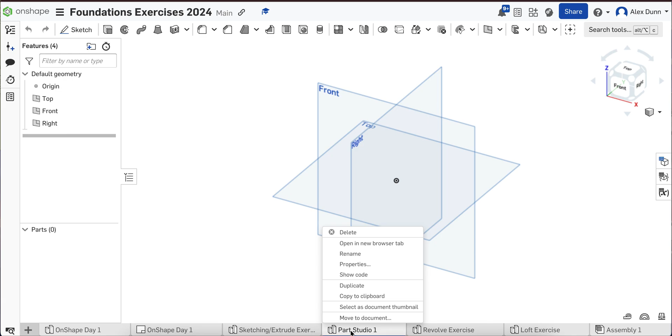This is a sketching and extrude exercise. Based on what you've already done in Onshape, you should be able to complete this using the tutorial video. It's a more advanced sketch. The extrude part is nice and quick and easy, but I'm going to go through this with you together. So you're going to create a new part studio, just as I'm doing here.

You're going to follow along and rename that sketching/extrude exercise. I'm going to be using my original sketch as my base to walk you guys through this. So this is essentially the shape that we're going to be drawing.

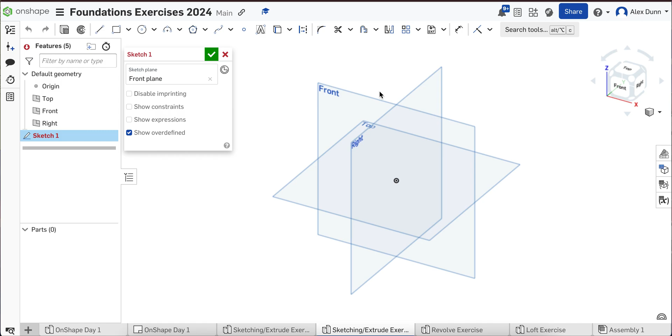Now I'm going to start off with this center point circle that's 8 inches in diameter. We are working in inches. So I'm going to make a new sketch on my front plane so I could view my gear from the front. Then I'm going to make a center point circle that's 8 inches in diameter, and then go ahead and zoom out.

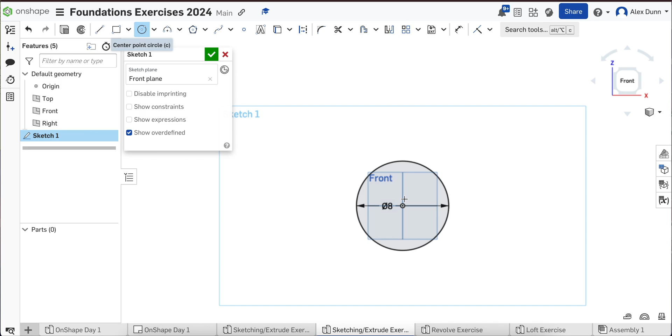Okay, now let's look at the next step. The next step I would go about doing is create this outside circle. If you're ever in an Onshape document and you don't know the diameter, length, or width of something, click on the shape and you'll see the dimension at the bottom right corner. The diameter of the outside of my gear is 30. So I'm going to go back to the document we're working in now and use a center point circle starting at the origin, also 30.

Now let's go back to our reference document. The next step I would probably do are these circles. I was able to do these circles really quickly using a circular pattern, so I'm going to show you how to do that. The diameter of my circle is 2, and that circle is both in line with the origin and 9 inches from the top of my outer circle.

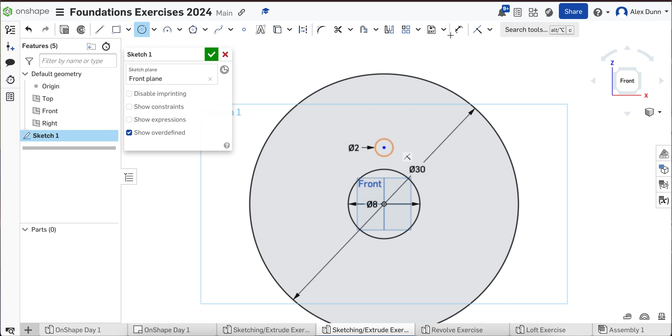So I'll use a center point circle, hover over the origin, and slide my mouse up. You see that dashed yellow line - that ensures it's in line with the origin. I'll click down and swipe out, then change the diameter to 2. Then I'll take my dimension tool, go from the top of the circle to the center, and change that to 9. The lines turn black, my circle's in the right spot.

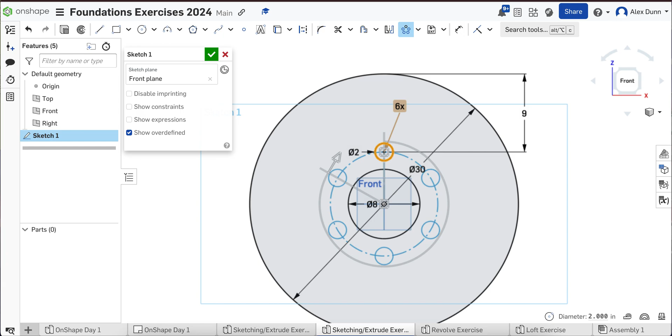Now we're going to use something called the circular pattern. You can find it under linear pattern, then choosing circular pattern. I'll click on the object I want to create a circular pattern of, and change this from 3 to 6 because I want 6 circles. Then I click away from my sketch, and there are my 6 circles, nice and quick and easy. All right, let's go back to our reference document.

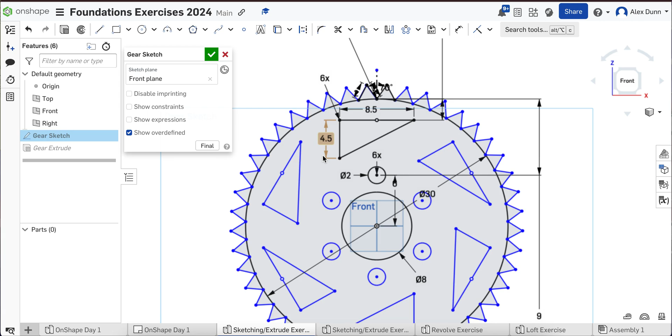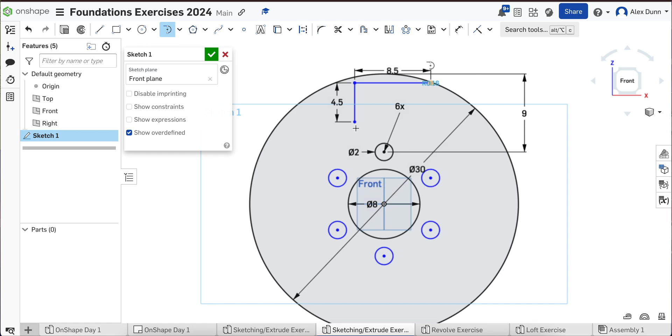And I am going to create these triangles. These triangles are going to be 4.5 inches up and 8.5 inches across. So before we position things, let's just draw it. There's no triangle tool, so I'm just going to use my line tool here. That was 4.5, and then I'm going to go 8.5 across, and then again use my line tool to connect the dots. You don't need to dimension that one.

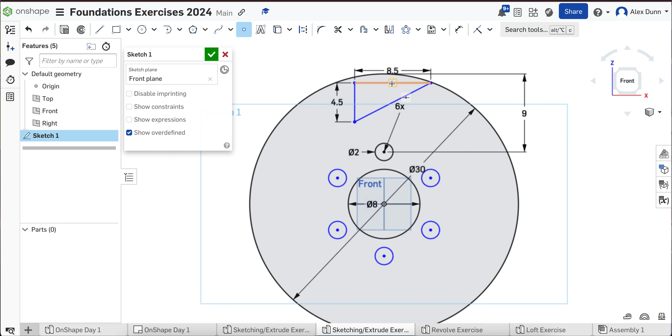Now, if we look back to my reference document, there's a point here. That point shows that the center point or midpoint of this line is in line with the origin. There's actually a point tool I'll show you how to use. If I go to search tools and type in point, I'll take a point and I want it to be at the midpoint of that line. The box shows up, and I click the point.

Then I'm going to use constraints. You've probably never heard of constraints, but there are different constraints that allow us to put parameters on different shapes, sketches, and points. So I'm going to use the vertical constraint, and I want the midpoint we just created to be vertical with the origin.

Let's see if I do this with this, hopefully it doesn't rotate it. There we go, not the origin. You're going to make the midpoint of the triangle that we just made vertical with the center point of the top circle, not the origin.

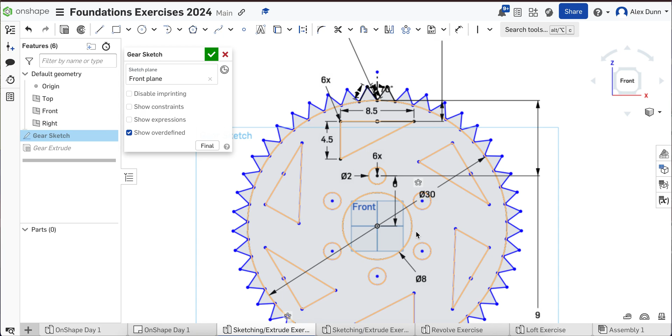So now we notice that the top of my triangle is 2.5 inches from the top of my circle. I'm going to take my dimension tool and go from the top of the circle to the top of the triangle, and that should be 2.5.

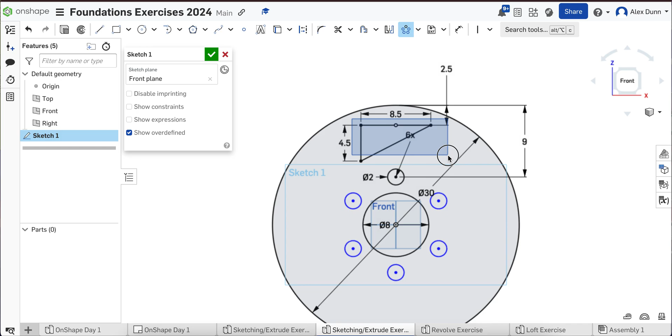Now we're going to use circular pattern again to create 6 of these all around. I'm going to choose circular pattern, then select my triangle shape. It only selected one line, so I'm going to click on the other 2. I'm going to change this from 3x to 6x, click away, and now I have all my triangles. It's okay if they're blue, that's because we only defined the first one and then created the circular pattern around.

Now, one of the last steps in our sketch is creating our teeth. In order to create our teeth properly, we are going to create a construction line in the center of the top of our circle. To do that, you have to choose 2 tools: the line tool and the construction tool. I am going to hover over the origin and move my mouse all the way up, click down and up.

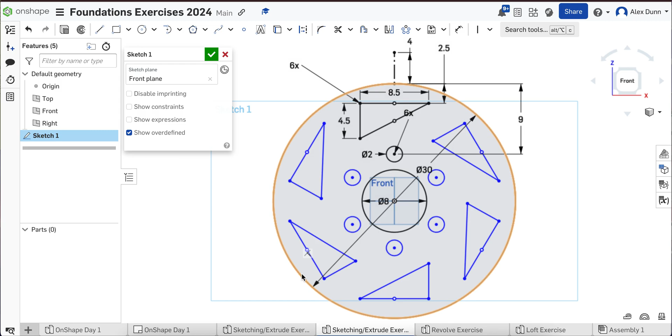The distance or length of this doesn't matter. If you want to make it consistent, make it 4, whatever's easiest for you. So we have that construction line, which is going to help us with some geometry here. So now we have our triangle.

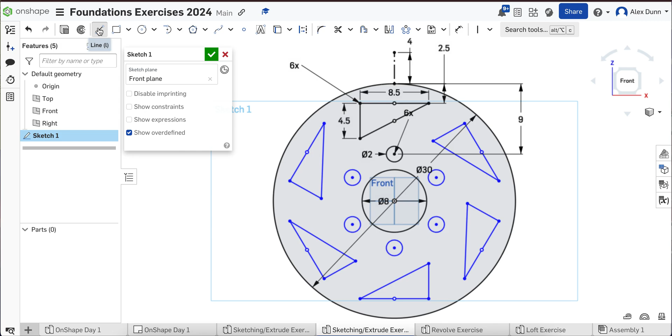I'm going to end up making 2 triangles at the top of my gear. Each triangle is going to be 2 inches by 2 inches, and the 2 triangles are going to be 70 degrees apart from each other. So I'm going to go back to my document, choose the line tool, zoom in, and first just make my triangle.

I am then going to dimension that triangle, 2 by 2. And then I'm going to make a second one. Now we can save some time by using the mirror tool, but I want to make sure that these triangles are in the exact right spot and the exact right dimensions as we move forward.

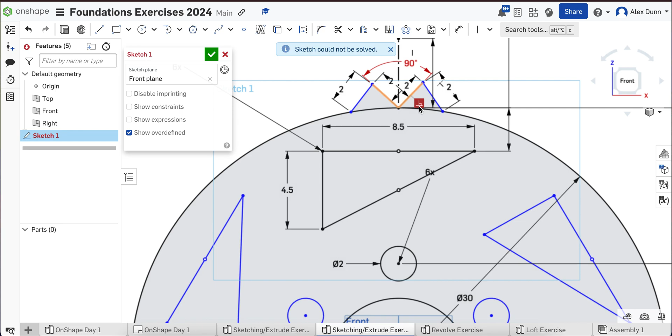Now, in order to put a degree dimension on something, you're just going to click the 2 lines that you want to add your degrees to, and that's going to be 70. Sometimes when sketches can't be solved, things pop up - whatever box is in red, you can just delete, and that'll move things. Now you'll notice one of my triangles kind of moved a little bit - the distance moved between the two.

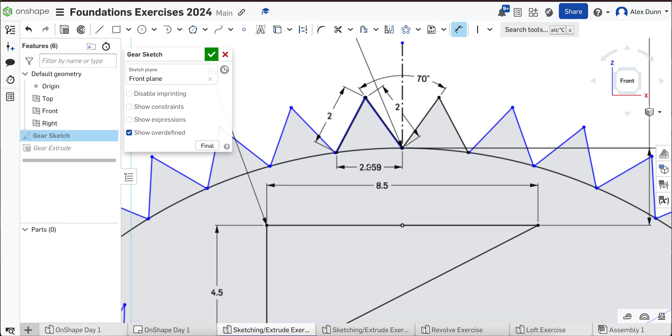So let's go ahead and use my dimension tool, my reference sketch, to dimension the distance between there. So it's about 2 - our triangles are about 2 by 2 by 2. We're going to see if I can put that dimension on here as well. Let's change this to 2, and then it moves it over. You see my lines are black.

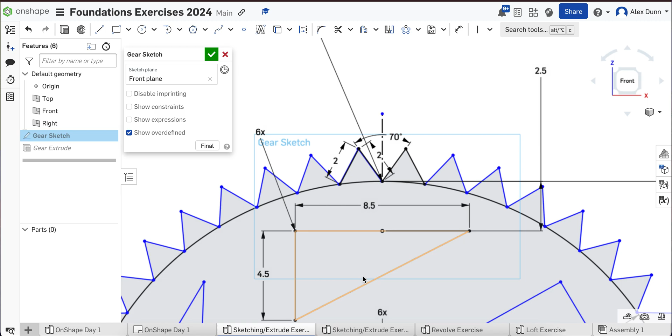Okay, now we're going to continue on the circular pattern tool. I know there's a lot going on here, so I'm going to choose circular pattern. Let's go back to our reference document - I want to circular pattern this 45 times. There might be some overlap, which is totally fine, we just want to make sure our gear teeth go all the way around.

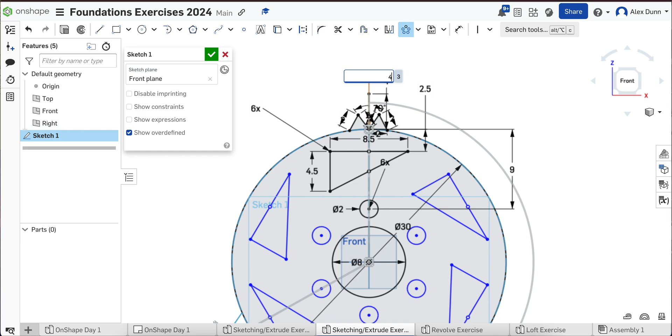So I'm going to select these 2 portions of our triangle, select circular pattern, and change that from 3x to 45. Now, it might look like they're not going to generate, but as long as I put 45 and click down, they will generate. I'm going to rename this sketch gear and hit the green check.

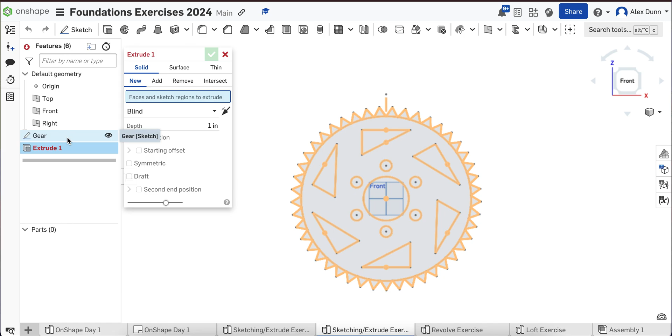Now, in order to make this 3D, we need to extrude, so I'm going to press extrude and come over here and press gear. Now let's see back on our reference document how thick I made my gear - 1 inch, nice and simple. So I'm going to go back. It's already defaulted to 1 inch.

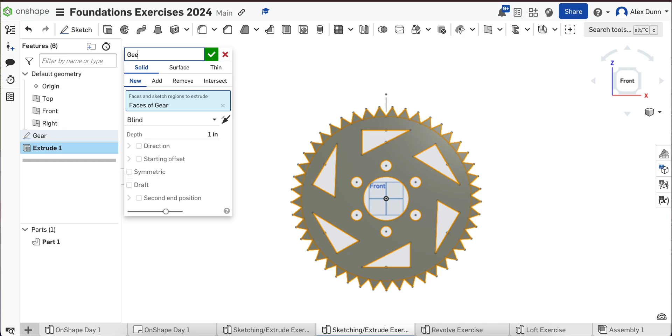So I'm going to rename this gear. Defaults to 1 inch, hit the green check. And you have your gear. Now, you should only have one part. In order to check your work, you need to assign material and then check the mass.

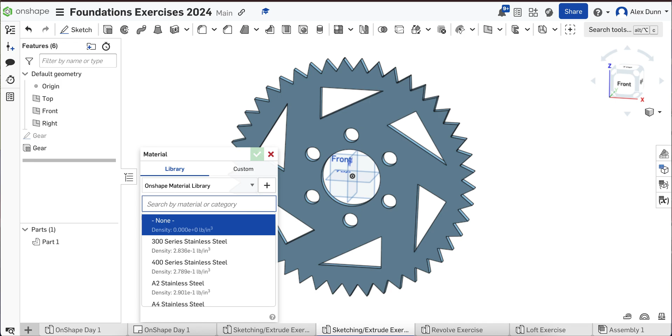So you're going to 2-finger click on part 1, assign material, and let's go ahead and choose gold. I'm going to hit the green check. I'm then going to choose my part, click the scale in the bottom right-hand corner, and your mass should be close to mine. If it's really off, if it's off by more than 2 pounds, talk to me and we'll figure out what the issue is.